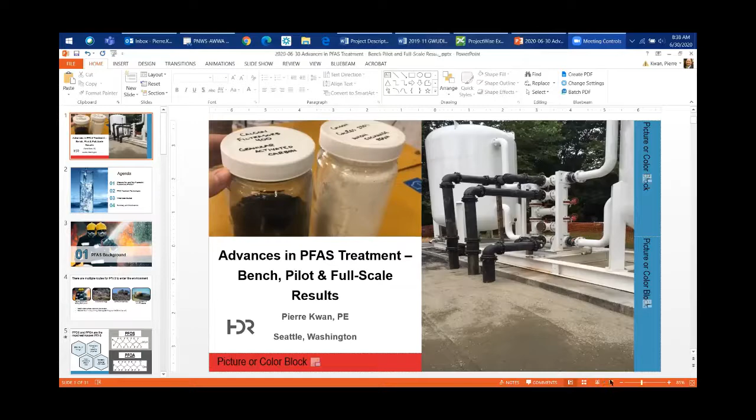So Pierre, I think you should be able to share your screen and present your presentation. Yes, Jolene, can you see my screen? Can everyone see my screen? Yes, okay great, we'll get started. Do you see the full screen, Jolene, or do you see how I present it on PowerPoint? It's showing your speaker view. Let me try something else, hold on just a moment. Maybe in display settings, okay does that work? Yep, perfect, thank you everyone.

It's a brand new world here, we're trying to accommodate the challenges everyone's facing right now. Thank you for joining today's water treatment presentation. The title of my presentation is Advances in PFAS Treatment: Bench, Pilot, and Full-Scale Results. I'm going to do three case studies of projects we've been working on, specifically dealing with PFAS.

Quick agenda: since I'm first, I'll give a slide or two description of what are per- or polyfluoroalkyl substances, the PFAS compounds. Then an overview of what utilities around the country and world are doing for PFAS treatment. Then I'll dive into three case studies to show actual full-scale performance, pilot testing, and bench scale testing results, and wrap up with summary and conclusions.

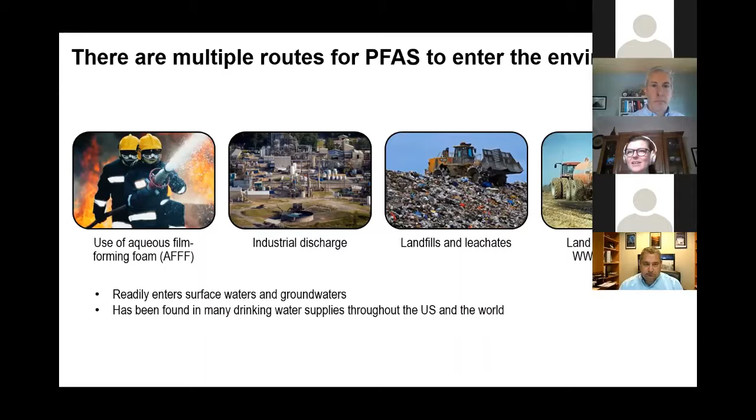So you can see it readily enters surface waters and groundwaters, and as a result it's showing up in many drinking water supplies throughout the US and the world. There's a huge family of compounds related to PFAS - over 1,000 different compounds have been identified. The most common are two specific ones: PFOS and PFOA.

There's a schematic design or chart showing these molecules. They do have health impacts. The EPA has established a health advisory level, HAL, of 70 nanograms per liter. If you're above that, the EPA recommends treatment, though it's not an MCL or secondary MCL. Many states have gone above and beyond that - especially, and I'll point to it later, Washington has proposed lower acceptable levels of these compounds in drinking water.

These compounds exhibit hydrophobic and hydrophilic properties, meaning they're in essence difficult to remove in many cases. Conventional treatment using coagulants or disinfection is not very amenable to removing these compounds. And the worst part is they're highly soluble and stable in water - once it gets into the aquifers or rivers, it moves quickly and does not degrade with natural bacteria. So they exist for quite a long time, and as a result they're not easily removed from water. They persist, and that's why drinking water utilities around the world are so concerned about this.

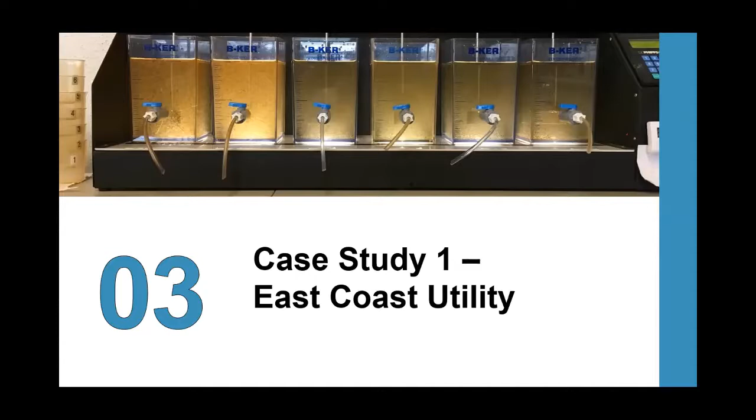So the first case study is going to discuss an East Coast utility. Because a lot of the sensitivity related to PFAS and its occurrence, especially in drinking water, this utility has offered to share the data—they just didn't want to be named in the presentation because of the issues they're dealing with.

For this one, this utility did a comprehensive surface water study. They're finding it actually in the rivers and reservoirs that they draw from for their treatment plants, and they wanted to investigate the occurrence of PFAS using powder activated carbon, PAC—a system they already had. And what does it mean, advancing towards the fate and transport of these compounds in the environment?

So it was studied with a watershed investigation, UCMR3. That was an EPA study that initially determined PFAS in their watersheds in over 20 locations. It was a 2-year investigation, and they found 11 different PFAS compounds in the water.

So then it was about adding a PAC system, or expanding the one they had. It was easy to implement, and initial literature showed it was effective for PFAS removal, but they wanted us to help identify the residual handling challenges—it is expensive to operate. Powder activated carbon isn't cheap; you use it only once, and it goes into your residuals that then have to be managed.

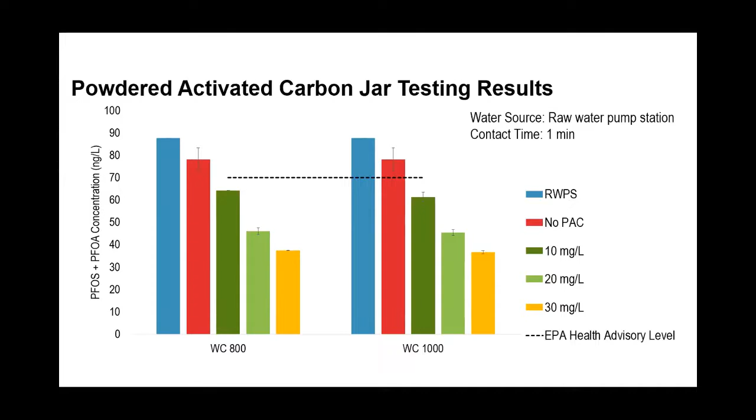The other thing we tested was in jars using a dose of just 20 milligrams per liter of powder activated carbon. We saw effectively no change in removal based on contact time. In this chart, we get about 50%, or slightly greater than 50%, removal for both carbons with only 1 minute of mixing time, contact time—so we just add it into the rapid mix, it goes through the flocculators, and out it goes, and we see half removal.

Then extending that to 60 minutes, all the way at the end of the sedimentation basins, we saw no real or minor additional removal with the Water Carb 800 carbon. We see better removal with Water Carb 1000, but still the vast majority of the removal occurred in that first minute—the additional 59 minutes provided some, but not substantially greater removals.

So taking these results into the full scale system, we decided on the 20 milligram per liter dose with the WaterCarb 800, and we see total PFAS, which is the summation of all 11 PFAS compounds found in the full scale plant. We saw a 42% reduction between the raw water and filtered water, and specifically for PFOS plus PFOA, we saw a 38% reduction.

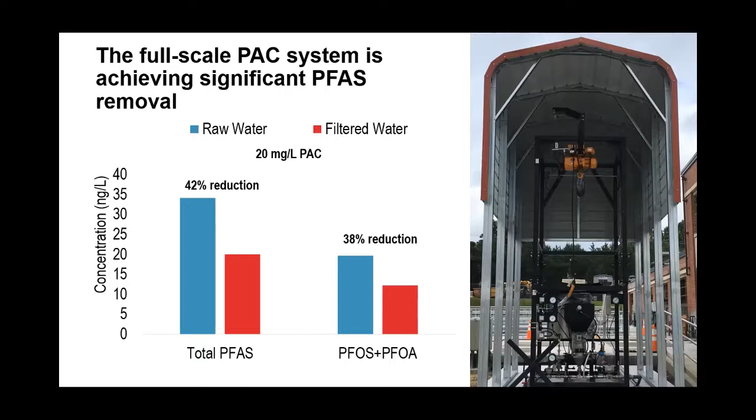A second case study, different state, similar situation. They wished to share the data but wanted to remain anonymous for now. They looked at granular activated carbon side by side with ion exchange.

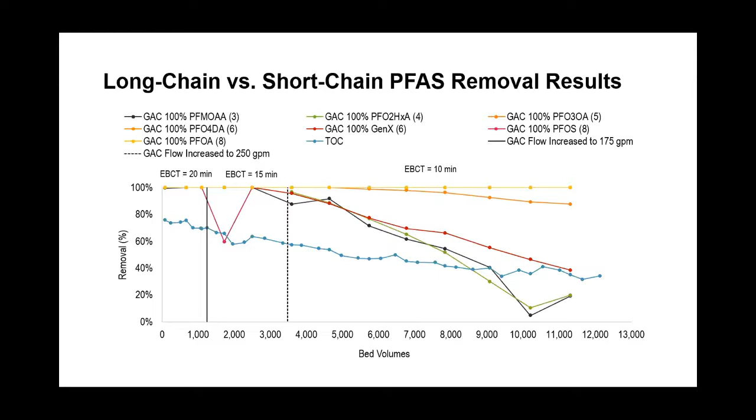Now that prior slide set is down to 70, and I'll show that the state of Washington has proposed lower numbers. So in any case, the PFOS compounds were much higher than all the limits, and we do see a smattering of other PFAS compounds in this water.

So this is a system that went into full-scale design and installation immediately. 2 vessels, lead lag configuration. We started off with the vessels, 1 vessel filled with bituminous coal and 1 with coconut shell carbon, in order to do full-scale testing immediately of which carbon acts better for removal. 20,000 pounds of carbon in each, and the system is currently designed for and operating at 250 GPM, expandable to 1400 GPM if contamination was found in other wells at this location.

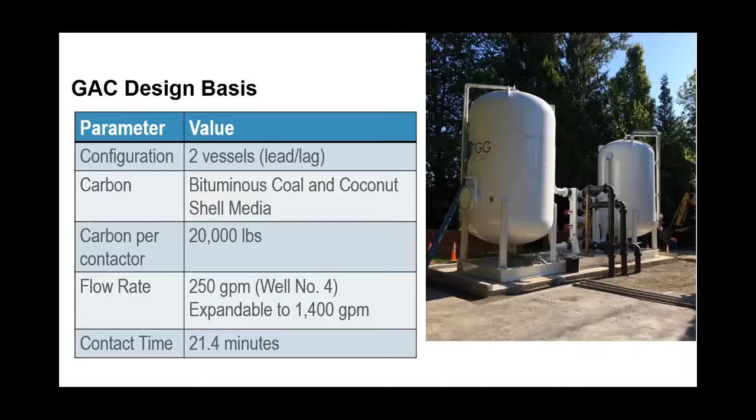It processed 102 million gallons before needing a change out, and that equated to 19,000 bed volumes before change out. Now compare that to the bituminous coal. It was installed 36 months and counting. In conversations with the city, they expect to start changing out that media sometime this winter.

So we can easily add another 6 months to that. So as of last month, they processed over 340 million gallons with this carbon, and so it's over 63,000 bed volumes. When it's all said and done, we could easily estimate 4 times the performance of bituminous coal in this full-scale test versus coconut carbon. Now because of that issue, both vessels are filled with bituminous coal.

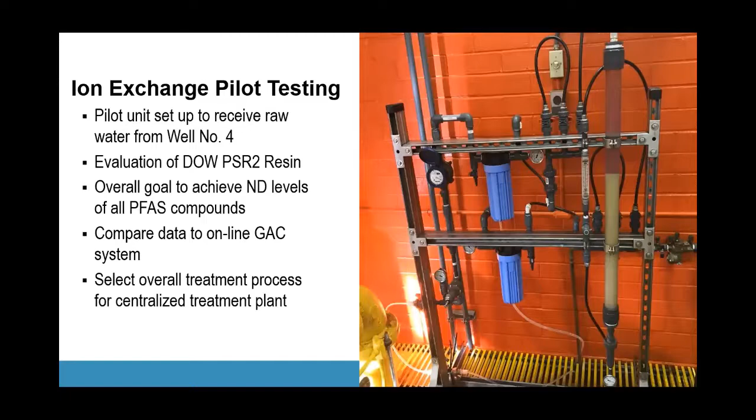Here's a little pilot unit. I want to note the tall cylinder on the right, the beige cylinder, that is the ion exchange resin. It came in slightly beige, somewhat translucent plastic beads. I want to point to that color later on, but right now at the start of testing it is a pristine beige color.

Pilot testing conditions: we loaded up the resins, really focus on the bottom line, which is empty bed contact time of only a minute to run the water through, versus the full-scale system at 21 minutes. Another benefit of ion exchange that's claimed is that you can load it with much faster reactions, and therefore use smaller vessels.

But in Issaquah, what we found is differential pressure. We saw that pressure really increase over time, starting at a clean filter differential pressure of 4 psi and increasing to 12. This happened over the course of just a month.

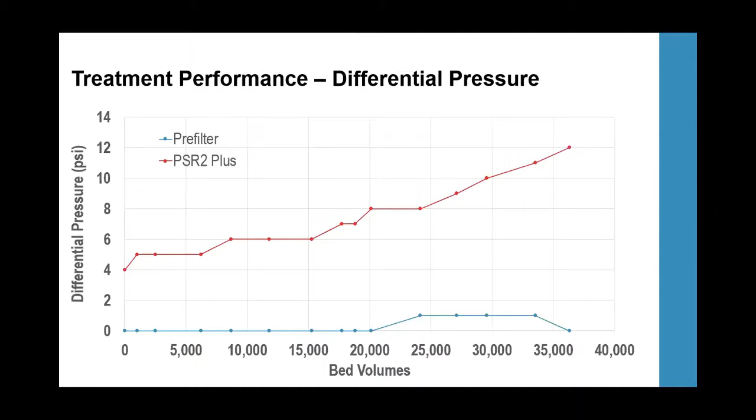The reason for that is we found there's iron bacteria in the well. It's naturally occurring, it's always been there. We sent the bacteria off to labs and found it's non-pathogenic, not a health threat, but it was specifically clogging the ion exchange resin.

This issue wasn't expected, so we didn't have an ability to backwash the pilots. The alternatives that came up were pre-chlorination and dechlorination for the resin, or high energy UV to kill the bacteria. But given these issues, and since the purpose of this testing was to move forward with full-scale design of their centralized treatment plant, the city decided not to pursue this and to continue with activated carbon.

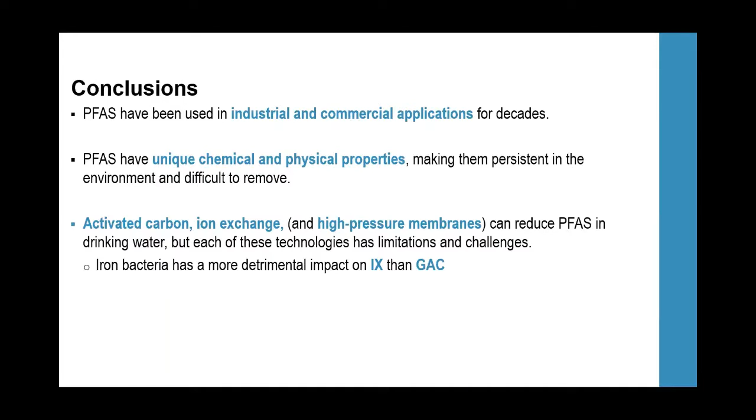High pressure membranes also work, I just don't have time to talk about that. Specifically, iron bacteria is more detrimental for ion exchange than for activated carbon in this testing.

The final takeaway points: all waters are unique and should be tested. There are a lot of different compounds you should look at besides just PFAS to identify fouling. If possible, you want to test different resins - ion exchange resin and activated carbon - to compare performance. You want to run it until you see breakthrough, and look at multiple ports in the columns in order to understand breakthrough patterns.

I didn't discuss nanofiltration or RO in this slide, but if you do test it, one very serious consideration is how do you manage that concentrate, because that residual brine is now very high concentrations of PFAS. So with that, I'm wrapping it up.

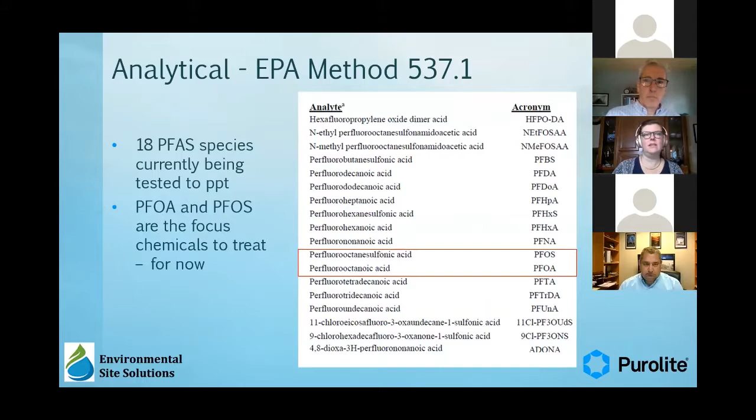So it's pretty pervasive. Very quickly, PFAS can be any one of almost 5,000 chemicals under the category of per and polyfluoroalkyl substances. We focus from a regulatory standpoint on PFOA and PFOS. EPA test method 537.1 looks at 18 different PFAS chemicals. Again, PFOA and PFOS have gotten the most attention, but some of the other PFAS are getting regulated by the states a little more tightly.

I think it's important to say that as ion exchange is getting more attention, we're seeing the numbers growing for ion exchange because it does have some significant benefits over activated carbon that we'll talk about a little bit later.

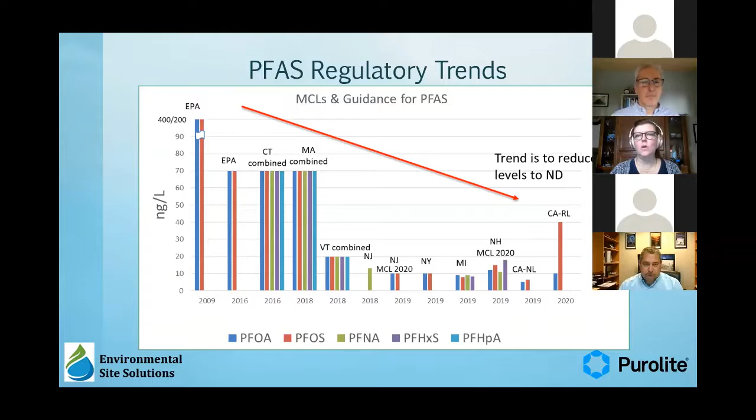But Washington has a DOH level of 15 nanograms or parts per trillion. Like I mentioned, I live in California. Even though we have a notification level and a reporting limit, as you can see on the chart, we're still being asked to have non-detect, basically on the lag bed.

So there's two different removal mechanisms that we see with these two different medias. The first is adsorption, and then with ion exchange, you have both adsorption and ion exchange. We're going to get into those a little bit.

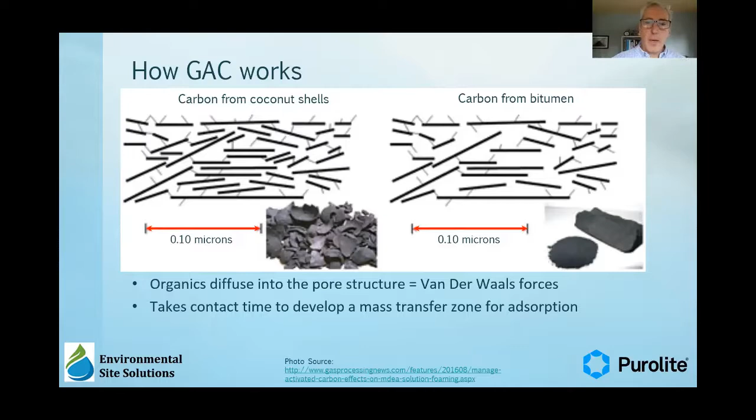Take it away, Mike. Yeah, so with granular activated carbon, this is kind of the industry slide, but it shows a good representation of pore structure within activated carbon. Activated carbon is an amazing material, has an incredibly large amount of surface area. So Kathy mentioned adsorption. Activated carbon works via adsorption, and because of the enormous surface area, it has enormous capacity to adsorb dissolved organics. We'll talk a little bit more about design, empty bed contact time, and mass transfer zone, and how activated carbon works.

What industry-wide we're looking at is about 10 plus minutes of empty bed contact time for treating PFAS. Other organics, you can run carbon at a shorter contact time, but we've seen 10 to 15 minutes is pretty normal for empty bed contact time design for PFAS systems. Carbon has the other advantage that if you have to take out other organics, whether it be chlorinated solvents or VOCs, carbon will take out those organics as well as the PFAS.

The challenge with carbon is it will also remove other organics, or TOC. TOC is kind of a generic term for organics in water, dissolved organics, which comprises hundreds of different organics. So that will compete to take up space in the carbon. Also with activated carbon, it does an amazing job on long chain PFAS, not as well on the short chain, as we'll show in the upcoming slides. And another nice thing about carbon, as we mentioned, is it's been used for years and has hundreds and hundreds of sites, and is very common for PFAS treatment.

So how ion exchange works. This is kind of a peek into my brain. I know that's scary, Mike, don't say anything.

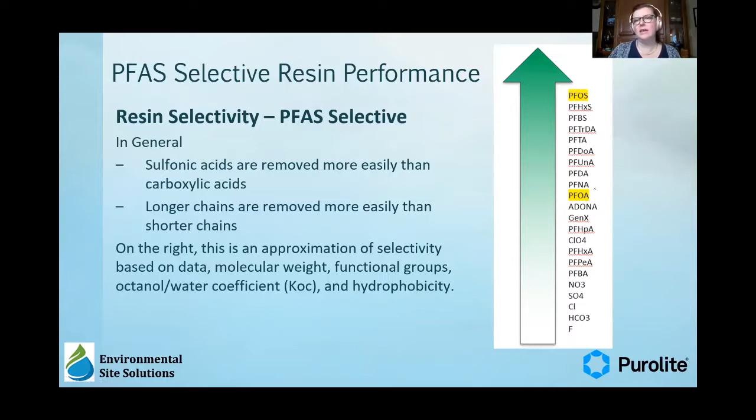So how does it know to kick off the chloride? Basically it's a function of the selectivity. You have your normal TDS in the water—nitrate, sulfate, chloride—and those are in the water like a million times more than any of the PFAS, generally speaking, for a drinking water application. As you go up this arrow, the resin becomes more and more selective. Anything with a sulfonate it's more selective for than the carboxylic acids, and the longer chains are selected better than the shorter chains.

So with resin, you want to make sure we're looking at a PFAS-selective, single-use ion exchange resin, because other anionic resins can pick up PFAS, but not to the extent that a PFAS-selective resin will. Purolite's is called PFA 694E, so if you see that in this presentation, it's pretty much synonymous. It can treat to 99.99% removal. The capacity is really determined by those other competitive anions in the water—nitrate, sulfate, chloride, etc. And as Mike mentioned, it's pretty effective on both long and short chain, and of course it's NSF approved.

I put this in here just to show you—it's really those other anions that determine the throughput of the resin bead, because the PFAS, though the resin is extremely selective for it, is in the water at a very small amount. It really only takes up about 1% of the bead's capacity, where all those other anions really determine the full capacity of that resin bead.

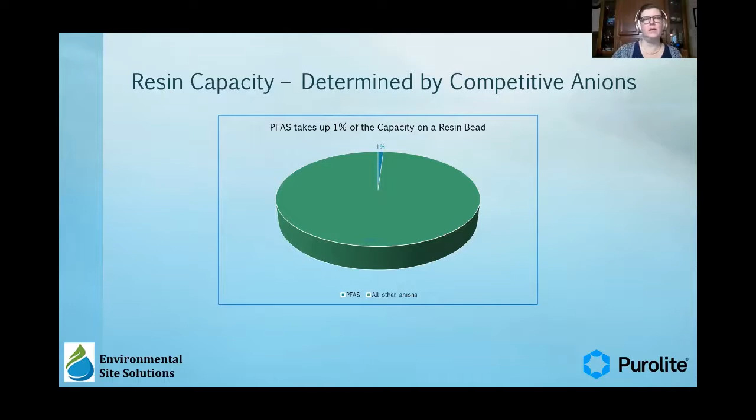Great, so now we're going to discuss a bit about design of a system. I can't stress enough the importance of water quality testing and analysis prior to the design. So we'll talk a little bit about water chemistry as well as modeling and piloting for system design.

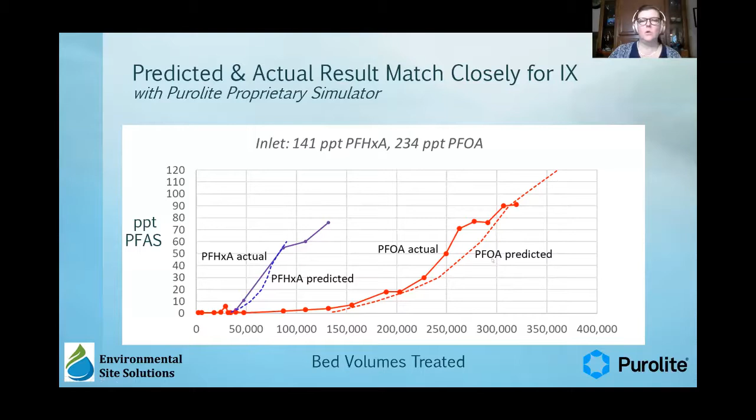With the water chemistry that Mike alluded to, if we have a very good water chemistry, we can accurately model ion exchange resin. I'll give you a couple of examples—the dashed lines are our modeling, the solid lines are our actual. This is a system on the East Coast, which has embraced PFAS treatment a little earlier than we have out west. But as you can see, the correlation is fabulous between the model and the actual.

So this would be a typical throughput model for ion exchange. This would be a Southern California site.

Generally speaking, even though we have many PFAS in the water, PFOA is going to be our driver for changeout because it breaks through before the PFOS.

A couple things to notice here: a lot of times we get the water chemistry from you, but then we're not sure what the endpoint is. If people are shooting for non-detect, that's a different point than if they're shooting for a 15 total PFAS or so on and so forth. So that's an important thing.

So here, what we looked at is, and I want you to remember this number for later, at 10 part per trillion we still have non-detect on the lag, and we'll get about 280,000 bed volumes in this example. We're going to go through an example in a little while, so I just want you to remember that number.

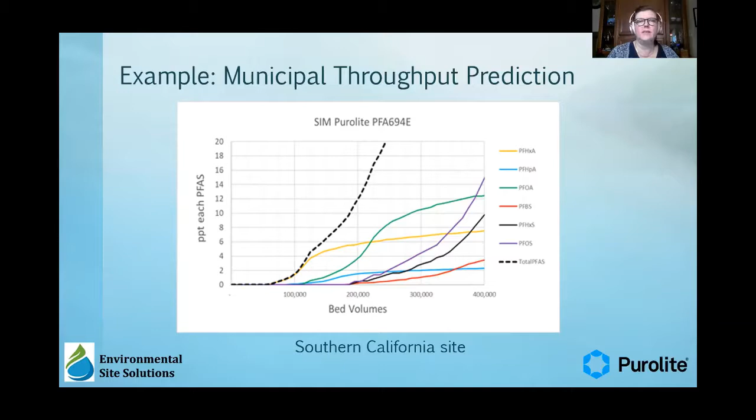Kathy mentioned modeling. Modeling can be done really effectively for ion exchange resin, not so effectively for activated carbon, because there's so much in the organics or the TOC. There's so much different type of organics. It's tough to model the PFAS.

So really, although we do need water chemistry for carbon, we'd be looking at either a bottle point isotherm test in the lab or running a rapid small scale column test, or RSSCT, which is a very common test for activated carbon. That will help us show throughput and model how long carbon will last.

Something to note: this takes time to see breakthrough, could take weeks, months. So what is typically done is there's sample ports put in at 25%, 50%, 75% of the bed to cut that breakthrough time. If we're looking at results after 25% of the bed, it's going to cut that time much shorter. There is a cost and a time that it takes to do a pilot, but we always highly recommend doing pilot systems.

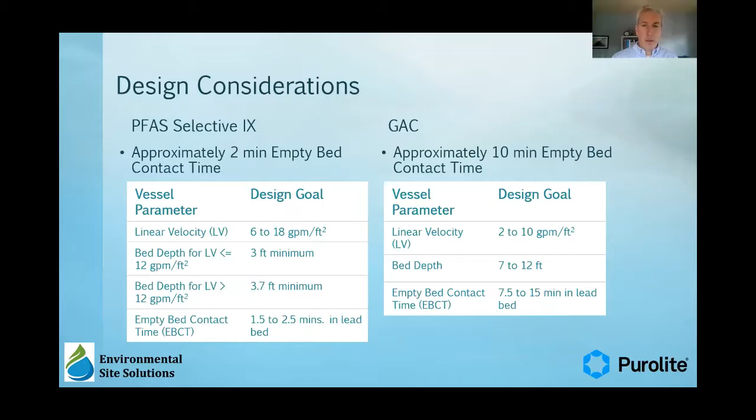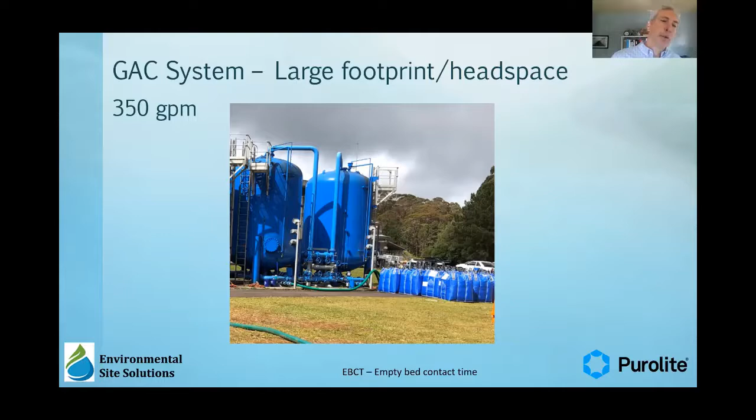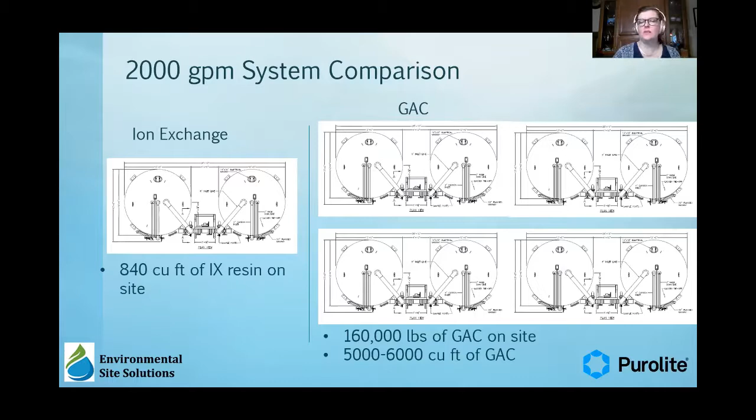The difference becomes even more dramatic as you go into higher flows. For an ion exchange 2000 GPM system, you can get away with one high flow 12-foot system with 840 cubic feet of resin on site. For GAC, if you're using 20,000 pound vessels, you would need 8 vessels and somewhere between 5,000 and 6,000 cubic feet of GAC. So like Mike mentioned, you're using 4 to 6 times more media with GAC than ion exchange.

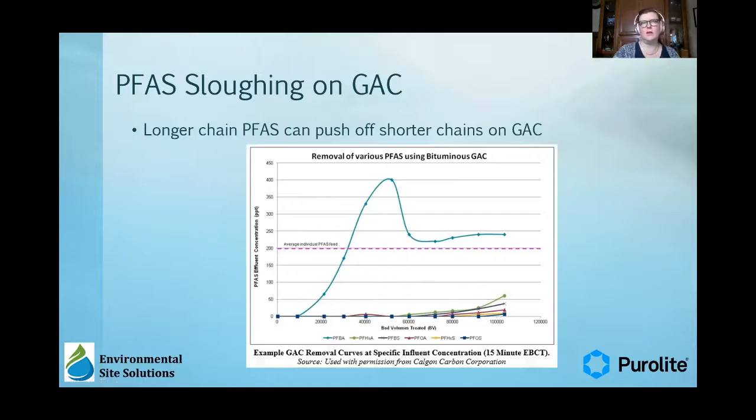One of the things we have seen with GAC is that because it's not selective for PFAS, it can slough or dump shorter chain PFAS. You can see in this example, essentially this is PFBA, the shortest of the carboxylic acids, the 4-carbon carboxylic acid. It comes in, and as the other PFAS are loading, the effluent concentration is almost double the influent concentration. So the influent's probably around 200 to 250, and it's coming off at 400 parts per trillion. That's not just seen with PFBA, but literally with every single one of these shorter chain PFAS until you get to your trigger change out for PFOA. So that's something to keep in mind as you're looking at different technologies and what states are looking at for regulations.

So Kathy, we need to breeze through this quickly, so I'll let you run through it, but we only have a couple more minutes to go. Okay, we're gonna fly through this.

So I wanted to drag you through an example so you can see what we're looking at between different designs. If we were looking at a 2000 GPM system, a couple things I want to point out: like I pointed out before, you have 4 times the amount of equipment, and this is only a 9-minute empty bed contact time, but it's still within the range of acceptable for GAC. Now, in terms of throughput, this is actually a real system—they were using GAC and getting 35,000 bed volumes. We estimated 280,000 for ion exchange.

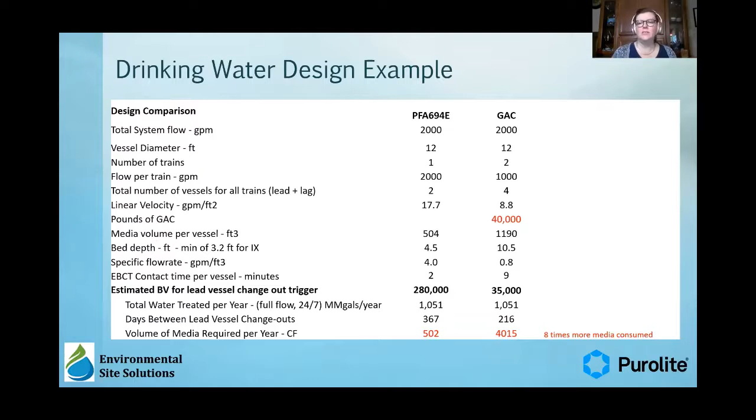Looking at those numbers, you have half the footprint, but you're also consuming 8 times more media. Now, if I change to 40,000 pound vessels instead of 20,000 pound vessels, as a lot of people have, now it's only half the footprint. The vessels are a lot taller, but I want to point out that you're still consuming, even with bigger vessels, the same amount of media. That still means 8 slurry trucks as opposed to 1 every time you do a change out.

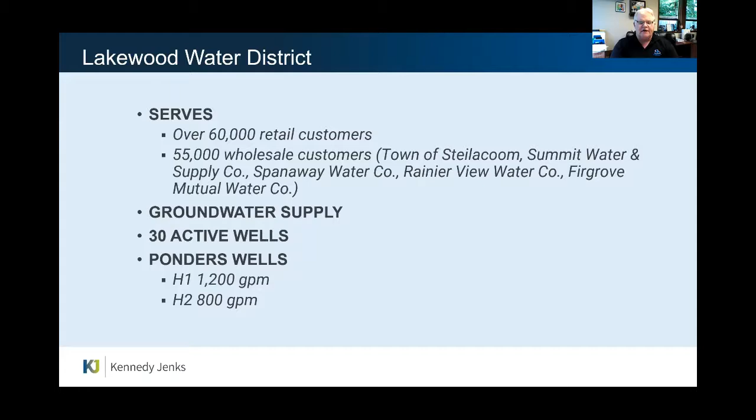Early on in the early 80s we detected PCE at the site. PCE was used in the 70s as a solvent for the dry cleaning process, and the Plaza Cleaners was a commercial laundromat and laundry service that served many of the businesses in the Tacoma, Pierce County area. In the 80s, it was linked as a carcinogen and as a toxic pollutant. The maximum contaminant level, or MCL, was set at 5 micrograms per liter.

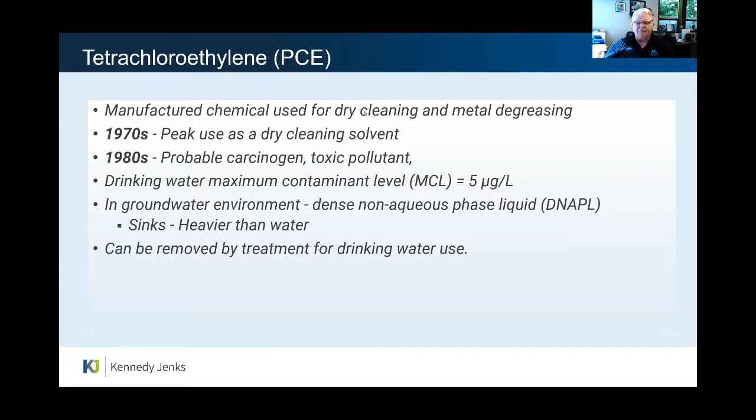It is found in the groundwater, and when it's in there, it's very dense and heavier than water. So that gives you a little idea of what you're contending with. It can be removed through treatment for drinking water use.

But as I mentioned earlier, in 1980, 1981, after we were testing for some SOCs and VOCs, we discovered at that time PCE at 18 micrograms per liter, and TCE also at 10 micrograms per liter. We also had dichloroethylene detected.

So what we decided to do was a 10-day pump test for both. We finally found the PCE ranged from 320 to 185 micrograms per liter. Later we measured the TCE at 28 micrograms per liter. This predates the VOC and MCL levels that we had at that time.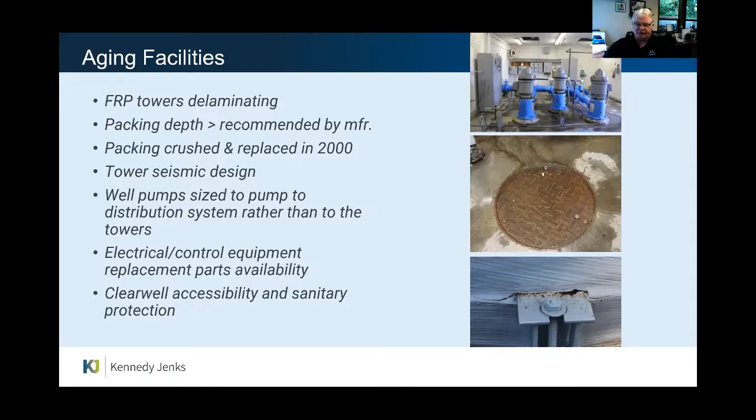There were some other things that made us nervous, which was the access to the clear wells you can see in the middle picture, which was recessed to some degree. So we were concerned about water quality issues around it as well, and had to take extra steps to make sure chlorination was happening. You can see in the bottom picture some delamination of the supports, and obviously not the most sufficient way for earthquake protection on the stripping towers themselves.

So all of this being said, we ran into funding challenges, to say the least. Back in the late 90s, EPA turned the site over to the State Department of Health. They took over primacy of it, and EPA did consider the replacement of the facility and maintenance. We did work cooperatively with them to see if they would continue to help the state, but they declined to fund any of it.

We did get an initial grant from the State Department of Health to look at the alternatives and really evaluate the site. Does it make sense for us to continue to use the site? Would it be more reasonable to possibly look at moving to another site? Those were part of the evaluation we did at that time. We also looked at what the impact would be if we did move to a new site, and what treatment levels or issues we might run into as well.

So at the end of the day, that study told us we really had the best alternative to stay at the site, given the water quantities and the flow of the aquifer. So we then had to work with the State Department of Health and Ecology to help get funding through the legislature, because this was really an EPA Superfund site that was taken over by the state. The state said we really had to work cooperatively with them to help get the funding for the replacement.

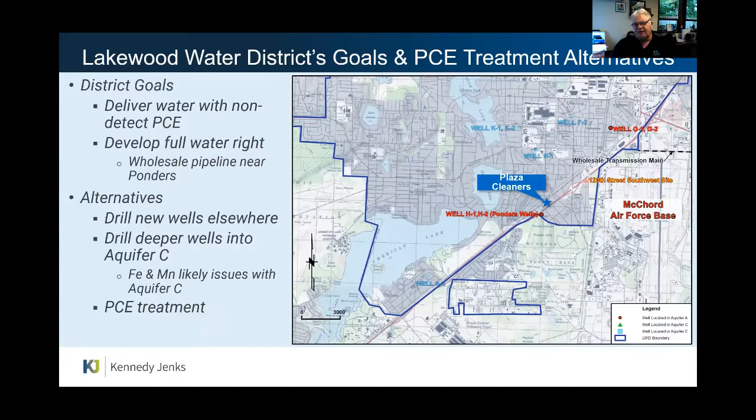Next slide. So at the end of the day, after we had staff involved and we engaged with our consultants, Kennedy Jenks, we ended up going back to air stripping. But we also decided this time to build the site knowing that we were dealing with at least 100 years of anticipated treatment, so we would go with something that would be there in the years ahead. And so we went with stainless steel stripping towers.

They're 25 feet tall. There's two of those. We have them in 8-foot diameters. And we have two booster pumps now. We've gone to line shaft turbine pumps, and those have been efficient.

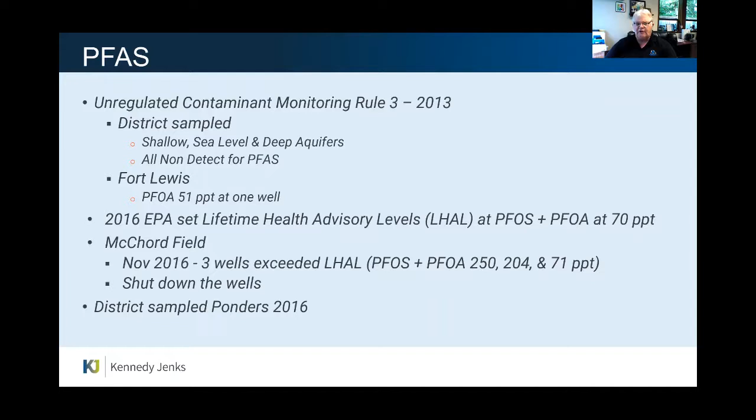And so we started to sample on a quarterly basis in 2016. Moving on, this gives you an overview of the site and how we feel that our contamination is coming from JBLM. Next slide.

This kind of shows the detection levels that we found with Ponder's well site. Our board decided to take a proactive approach, and we actually shut down the site back in 2018, because of the levels we were seeing with the PFOS and PFOA. Next slide.

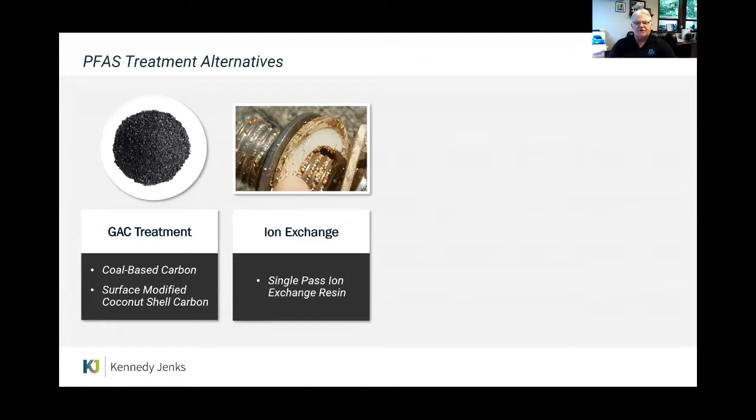So again, we decided to go with a GAC treatment facility for the site. Do you want to, Milt, talk about the different sites, the different types of treatment? Sure. So as has been discussed earlier today, there are 3 typical methods of treating for PFAS: GAC, ion exchange, and reverse osmosis, and there's always the potential for blending.

Blending wasn't really an option at this site, as also previously indicated. Reverse osmosis and nanofiltration are extremely expensive. And at the time we started working on this, I think there might have only been 1 ion exchange facility operating in the country, and I think it was operating in series with GAC. At that time, we were in the process of designing a GAC facility in Southern California.

So just looking briefly at GAC and ion exchange, GAC has been proven effective over the years. It's widely used for PFAS removal, and it's particularly good for long chain PFAS, which was our major concern.

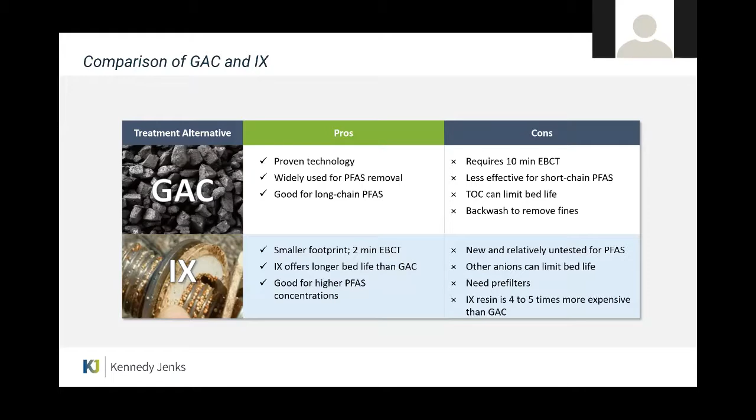So, as Randy indicated, the Ponder site was shut down in the fall of 2018, and the decision was made to add GAC for PFAS treatment. The intent was to try to complete this design and construction in time for the peak season of 2019.

That didn't give us any time for pilot testing, but we looked at some rapid small scale column tests we'd previously completed for Eastern Municipal Water District, which had similar low levels of TOC. At Ponders, we're looking at about 0.2 milligrams per liter of TOC, and at Eastern we had under 0.5 milligrams of TOC. At that time, the Eastern well 59 PFOS and PFOA concentrations were a fair amount higher than what we had at Ponders.

With the pilot testing conducted by our subconsultant at Eastern, we looked at both enhanced coconut shell and bituminous carbon, and two different models: constant diffusivity and proportional diffusivity. These models are used to basically develop the media size used in the rapid small scale column test. We were getting substantially longer bed life with bituminous compared to coconut shell, roughly about 4 times longer bed life.

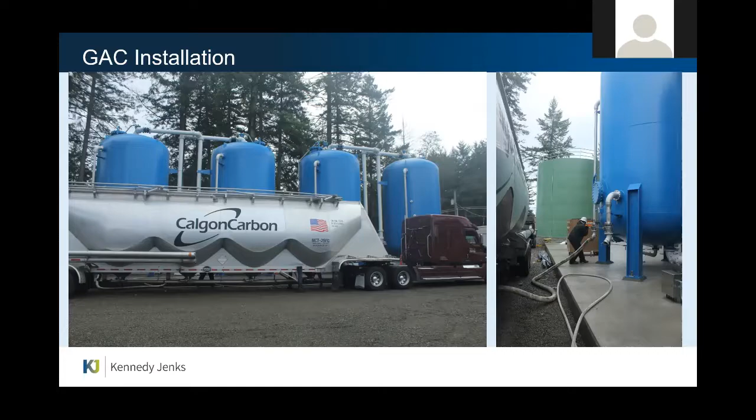And this is what the site looks like today, with the 2 packed aeration units, the precast or prefabricated pump station, the GAC vessels, and the backwash tank.

There were a few issues related to delivery of the GAC. The vendor didn't meet the delivery schedule, and we also had an issue where the GAC vendor was required to provide a template for the anchor bolts, and it turned out the anchor bolt holes on the vessels didn't quite match up with the legs. So we ended up having to scramble a bit to get them anchored down.

Also, the pump station was prefabricated, but being a prefabricated unit, it requires certification from Labor and Industries, and Labor and Industries didn't quite meet our schedule getting to the fabricator's shop, so it arrived on site late. We didn't quite meet the 2019 season, but it's been operating since January, with non-detects, as Randy indicated, both on the PCE and on the PFAS compounds.

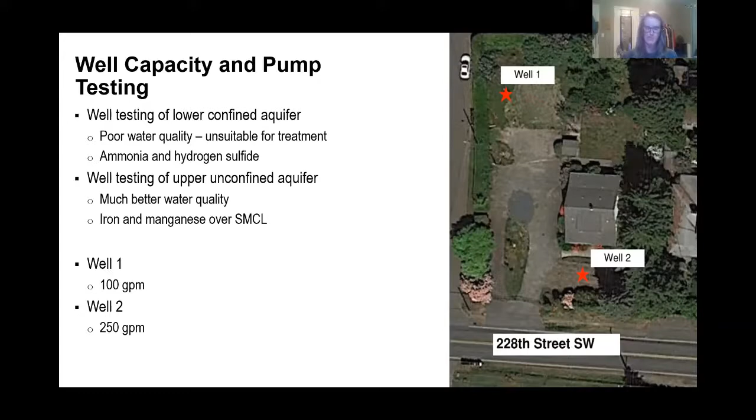Jumping into the treatment process selection for iron and manganese, we looked at a couple of different options. Adding sequestrant was one option, which disrupts the ability for iron and manganese to cause aesthetic issues in the distribution system. However, with the high levels we had, sequestrant probably wouldn't be very effective and could lead to black and red water issues with those compounds.

Typically sequestrant only lasts about 24 to 48 hours as a mask in the distribution system. With those 2 reservoirs, water is likely to be, especially in the wintertime, sitting in those reservoirs longer, around that 24 to 48 hour time period.

So that option was taken off the table. The second option we looked at was blending—diluting the iron and manganese concentrations with SPU water. However, with the limited capacity at the site of only 350 GPM, that really limited the amount of water we could pump to meet those secondary MCL levels. So that option was also taken off the table. The third option we looked at was removing the iron and manganese with treatment, and that was ultimately the selected option for the site.

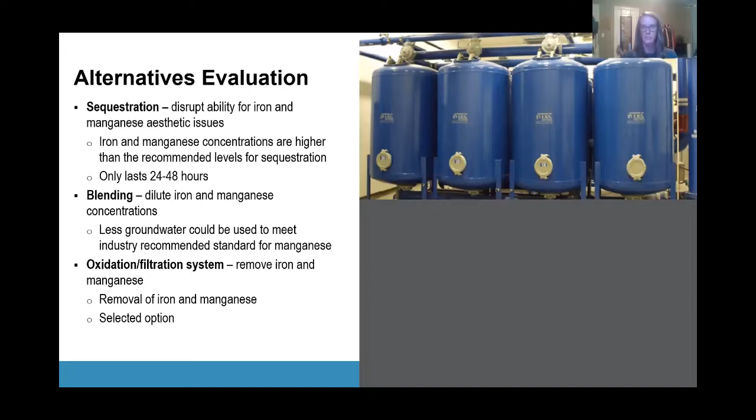So a summary of those pilot testing results: we ran the pilot test for a single day, and over that day the chlorine demand averaged about 0.6 milligrams per liter. That was the basis of the design for the new facility. As part of that, we paid close attention to pH—there was a small drop, but nothing too major, going from 7.6 to 7.58 over the course of pilot testing. As shown in the graphs in the previous slides, the pilot testing really supported a reduction of iron and manganese concentrations.

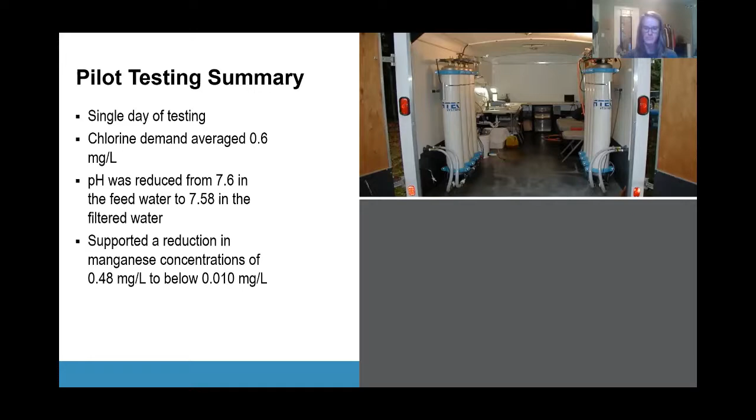Jumping into the filter design, the filters tested were pyrolusite filters. To meet the 350 GPM capacity, there were 4 filter vessels on a skid. This is not a redundant system, since this source is really going to be used for offsetting SPU costs in the summer and as an emergency source. So if some of these vessels went down, the whole facility would just go down for that time period.

The design flow rate is 350 GPM. Each of the vessels is 42 inches in diameter. The surface loading rate is 8.9 gallons per minute per foot squared during normal filtration operation. The empty bed contact time is about 1 minute during normal filtration, and the backwash rate is 269 gallons per minute.

So a little overview of the treatment processes. The main process is the pyrolusite filters, since that removes the iron and manganese, which was the main water quality issue. We're also adding chlorine, sodium hypochlorite, as a disinfectant. We're also adding orthophosphate for corrosion control, matching what the district currently feeds at their Deer Creek facility. Lastly, we're adding sodium fluoride, also used at Deer Creek and at SPU, to blend and make sure the water quality matches the existing sources it will be blended with.

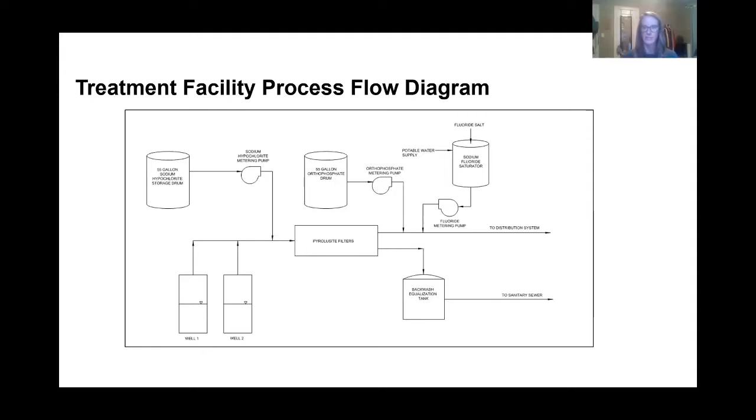Getting a little more into the backwash disposal, the waste sources for this backwash tank are the backwash waste from the filters, which are estimated to need backwashing approximately every 24 hours of use. This facility is estimated to run about 8 to 10 hours a day during the summer, so that could be 2 to 3 days before the filters have to be backwashed.

Also, the well 1 and well 2 blow off water, for when they haven't been started up in a while, feeds into the tank and is slowly fed out into the sewer through an air gap. The tank on site will be 10,000 gallons, quite large, but that will provide at least 24 hours of storage if the filters need to be backwashed and the wells need to go through the blow off line all at once.

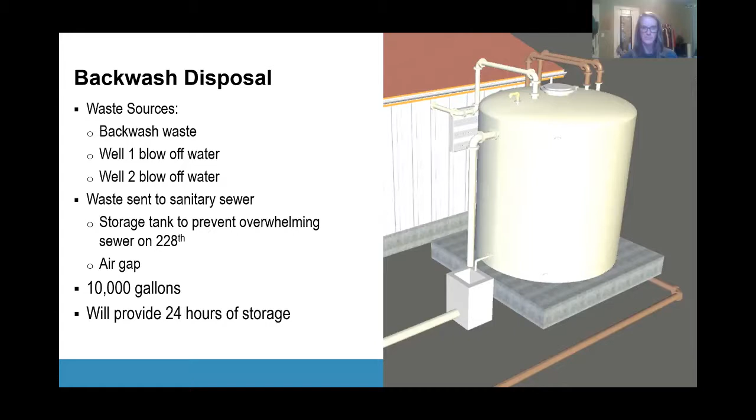So getting into the bulk of the presentation: the site constraints and the permitting requirements for putting a facility in this residential area.

Diving a little more into the project site, you can see the site is located on a cul-de-sac. The main access is through the arterial, 228th Street Southwest. This site is owned by the district - they own the house and maintain the property, and their water treatment operators can work on the landscaping and take care of everything there.

In the back of the property there are some mature fruit trees, and the district allows residents to come and pick the fruit and use it as they'd like. The district and residents really have access to the full property whenever they feel like it. The district currently has a covenant with the neighbors on that cul-de-sac - there are 5 houses, and as part of that covenant there are certain requirements for what the district can and cannot do to the site, really to fit the aesthetics of the neighborhood. That was something we had to be aware of as we went through this design.

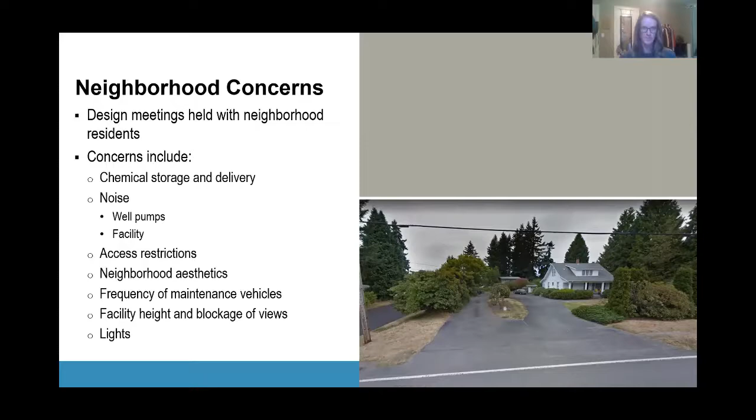Some of the facility features included in the design to address those neighbor concerns: submersible pumps for the well, so everything is below grade, which helps limit the noise when the facility is operating. Also facility vents for ventilation, all facing the interior of the site to limit the noise from the facility.

Also, really landscaping - like you saw, there's going to be a massive backwash tank, and we're really trying to blend that in with the neighborhood. We'll be adding some new trees and landscaping just to kind of keep people's eye away from that, so it doesn't look like there's a facility located on the site.

Also, really being involved with the neighbors as we get to this final design stage of selecting the color of the facility and little details like that that the neighbors may have opinions on, even though it really doesn't matter what color the facility is. That's where we really want to involve them in that process.

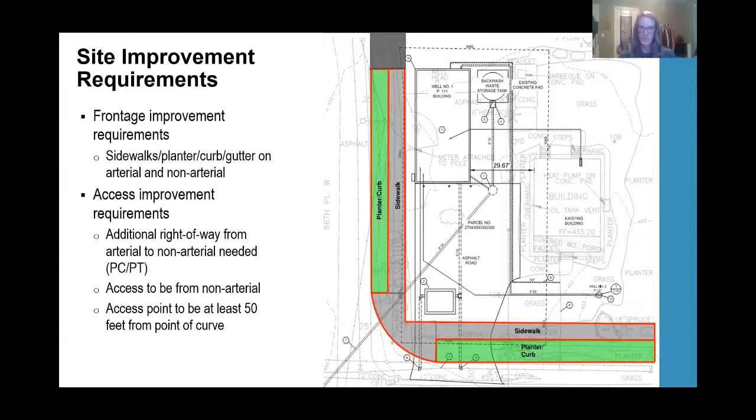So the current status of where we're at in design is we've submitted a couple deviation requests. Those requests are to propose a lesser standard on that non-arterial cul-de-sac street. Instead of 7-foot sidewalks, a planter, curb, and gutter, we're trying to propose 5-foot sidewalks, which is what most of the cul-de-sacs in the area have, if they have sidewalks at all. We're also proposing to maintain the current access point on the site as it is now, because we don't want chemical delivery trucks driving down that cul-de-sac, and to help meet the concerns of the neighbors. Those are two things we're waiting for responses on.

But we will be adding in a sidewalk, curb, and gutter on the main arterial street in the front of the site, because that whole street is going to be redone in the next couple of years. Additionally, adding on the sidewalks adds a lot of impervious surface, which has triggered some additional stormwater requirements that we're now going through, requiring us to do some pilot infiltration tests and review a couple more on-site stormwater management options.

Jumping into operation and maintenance of the facility and the site itself. Since it will only be used in summertime, we want it to be easy to start up and shut down, and sit idle easily, making it simple for operators who will now manage two different facilities: this one and the Deer Creek water treatment plant.

Part of that also involves managing chemical deliveries in this residential neighborhood, making sure we're efficient about when those chemicals are delivered so they don't disrupt the residents.

We also need to maintain the landscaping. The neighbors enjoy the fruit trees on site and like to pick the fruit, so the district plans on maintaining those, along with the flower beds, all the landscaping, and mulching.

In addition, maintaining a secure environment is important. This will be a facility that needs to fit in with the neighborhood without causing safety concerns or drawing attention to the site.

Moving into summary and conclusions, a few tips from what we've learned throughout this project. The most important one is to engage the community, and engage them early. Many of the concerns we received from residents were very easy to address as part of our design.

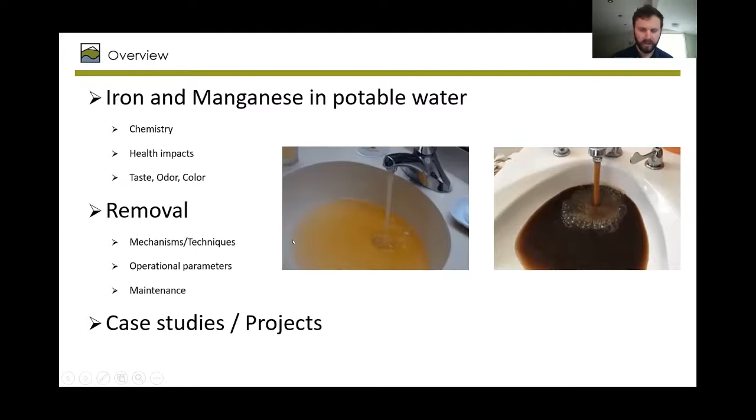So the basics: iron and manganese are two metals that are common in the Earth's crust. You see here elements 25 and 26. They often occur together, but not always. They're often in their dissolved state, but they can also be in their particulate state. We're often worried about it in the dissolved state. These are cations, positively charged ions. Some common redox states: manganese in the +2 or +4 oxidation states, iron in the +2 or +3. They can show up without color in their more reduced states, and once they become oxidized, this is often when we see the color — the typical brown, red-brown, black. I'd say they're common in groundwater, commonly occurring in their dissolved form. They can also show up in surface waters, especially anaerobic zones of deep reservoirs where there's reducing conditions.

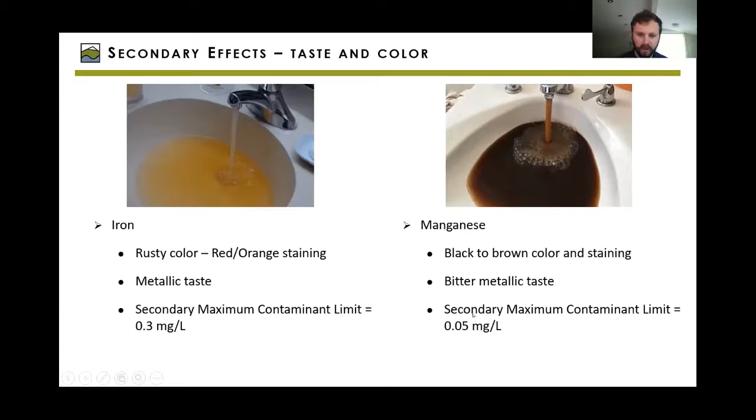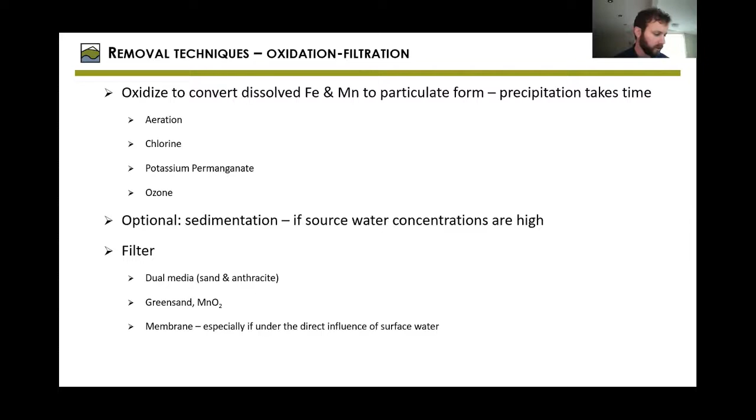The next technique I'll touch on is categorized as catalytic media filtration, which is kind of the same idea as oxidation filtration, but the precipitation is catalyzed essentially by the media, so it doesn't require a big reaction chamber and long reaction times. I forgot to mention it, but to fully precipitate iron manganese can take quite a bit of reaction time - it can take up to about 20 minutes for iron, or even an hour for manganese for full precipitation.

But in this catalytic media filtration process, that time is greatly reduced, and actually the oxidation and precipitation can occur within the filter itself. So it doesn't require the reaction chamber and volume that would otherwise be required. It can also utilize some adsorption within the media, so there are multiple processes going on. This is a really common technique, and we'll compare these at the end, but this is what I've seen to be the most common way to remove iron manganese.

Again, it relies on oxidants to both regenerate the media and oxidize the iron manganese. Common oxidants are usually chlorine, especially sodium hypochlorite, or potassium permanganate. It relies on the filter media, which is often some proprietary media, but usually some form of manganese dioxide, either ore or coated sand. For each proprietary system, there are various loading rates, mechanics, backwashing requirements, and removal efficiencies, but I think most of these are on the same order of magnitude, with some slight nuance differences in the manufacture of the system.

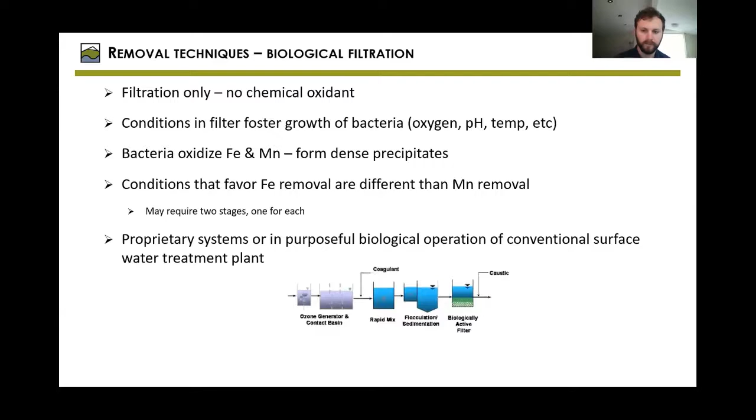The fourth and last removal technique to discuss is reverse osmosis. This can remove almost all suspended and dissolved components in our water. The downside is that it requires either remineralization of the water to make it palatable and less corrosive, or the other technique is to blend some portion of the flow around the RO unit.

If you've just got iron and manganese and no other contaminants of concern, it's probably not going to be cost effective. But if you've got other contaminants of concern as well, that's when RO can be more cost effective—if you've got hardness, chlorides, or other things that RO is effective at removing, it might make sense.

So just to recap on the treatment techniques here: we've got oxidation filtration, which can be effective, but to have full precipitation can take a lot of time. So more commonly, catalytic media filtration is used. It can efficiently remove iron and manganese, it's cost effective, has a small footprint, no large reaction chamber needed, and is easily operated.

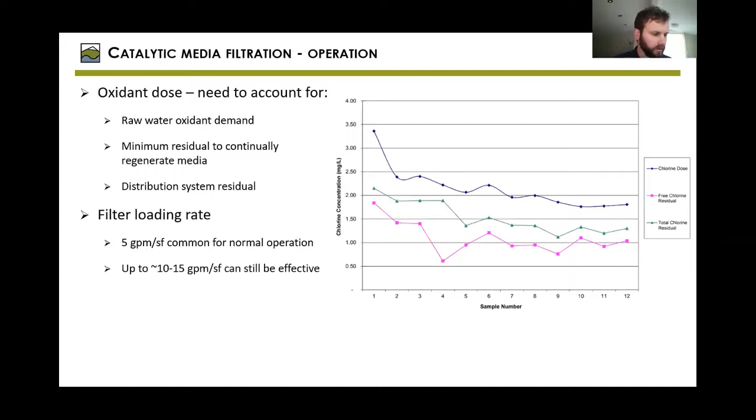That's going to shift the pressure, so where your operating point is, you need to account for that. That worked well with constant flow rate sources.

It's a little more challenging if you've got changing flow rate in your source or multiple sources, because you really need to maintain a set velocity through that filter, set flow rate through that backwash to make it effective at backwashing off the particulate iron and manganese.

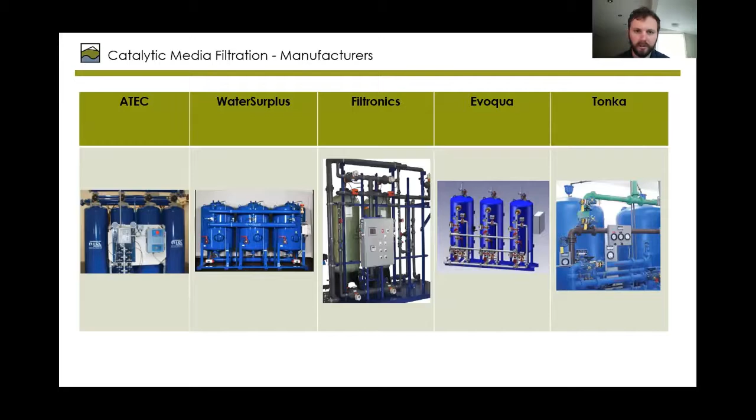I've got a slide here on a number of common manufacturers of catalytic media filtration systems. ATEC is a common one; they're based in the Northwest, and there's a lot of their installations here. Some other manufacturers that also make these systems are WaterSurplus, Filtronics, Evoqua, and Tonka.

Real quick here, I've got about 3 minutes left, so I'll touch on these 2 example projects.

A lot of systems these days don't have these reaction vessels - there's not much contact time before it hits the filters. Anyway, this project is kind of a fun one; we're phasing the improvements, replacing the treatment equipment now. The pumping equipment is still in reasonable shape, so we're upsizing that as part of it.

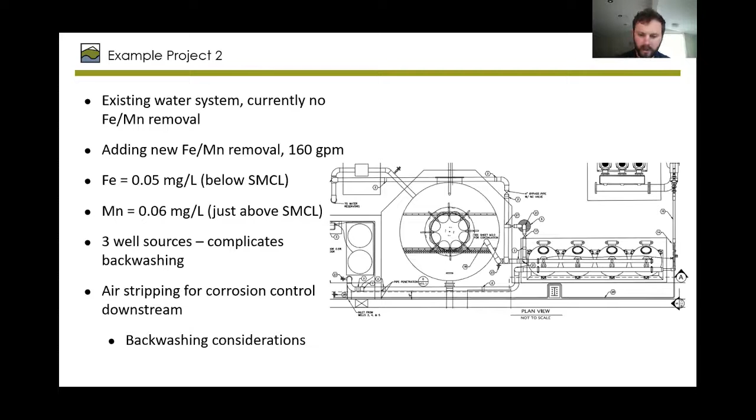Looks like I'm about out of time here. See if there's any questions. I'm not seeing any here.

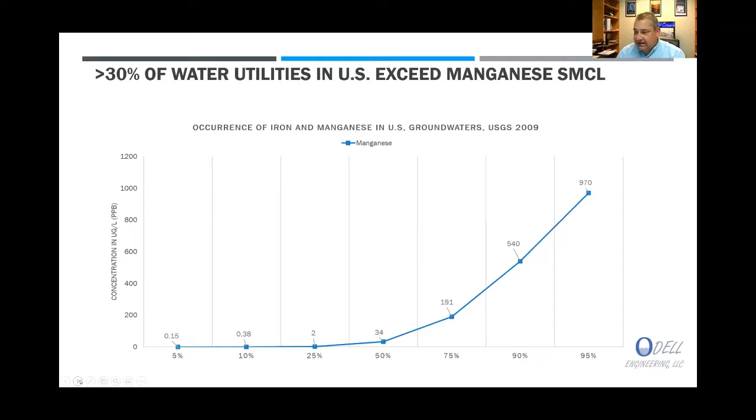Great lead-in by Brian. We're going to talk a little bit about manganese because it's very common. About 1/3 of water utilities in the US are above the secondary MCL of 0.05. It's commonly found in a reduced form in groundwater and can be oxidized by exposure to a number of different oxidants. The reduced form is manganese, Mn+2. The oxidized forms are Mn+3 or +4, and even higher oxidation states for permanganate. Normally CO2 works to dissolve manganese in minerals and forms manganese bicarbonate compounds, but sulfate reducing bacteria can also be present, so you might have manganese sulfide compounds, or you can also have organic complexes with the water.

So why do we want to remove it? Brian gave a great example - you see discolored water all over the place. There's also a lot of concern about buildup of manganese scale in distribution pipe, and that scale will periodically release large volumes of material and cause discoloration events, and a number of different things can trigger that. There's also a lot of new health information that shows it may have a neurological effect in children. So just last year, Canada updated their maximum allowable concentration, establishing both a primary health level, a MAC of 0.12 milligrams per liter, as well as a lower aesthetic objective of 0.02. That 0.02 level is really there to prevent scale buildup in the distribution system.

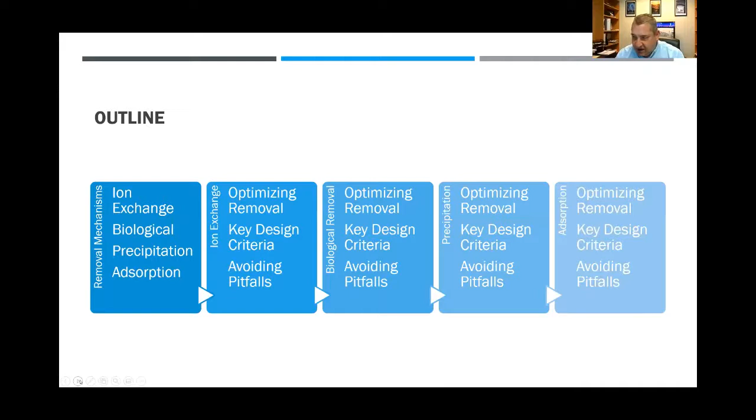So I'm going to cover the different removal mechanisms to get manganese out of water, and then talk about each one - maybe what the key design criteria are, things to think about to optimize removal, and some concerns or potential pitfalls with each one of those. First, removal mechanisms - there's a lot of different ways to get rid of iron and manganese. If you do any research, you'll see all kinds of different ways. Some of them they say are proprietary and don't want to tell you how they work, but there's really only 4 ways to get rid of manganese from water.

You can exchange it in a cation exchange process. You can uptake it with a biological process. You can precipitate it and remove the precipitate, or you can adsorb it onto oxides in media. So let's talk about each one of those. Ion exchange first.

The removal process for manganese is the same as for water softening—it's a cation exchange process. Calcium and magnesium are present in water as divalent cations, and that's the same form that manganese takes in its reduced form, as well as iron in its reduced form. So the same process used for calcium and magnesium removal in cation exchange is also potentially available for manganese removal.

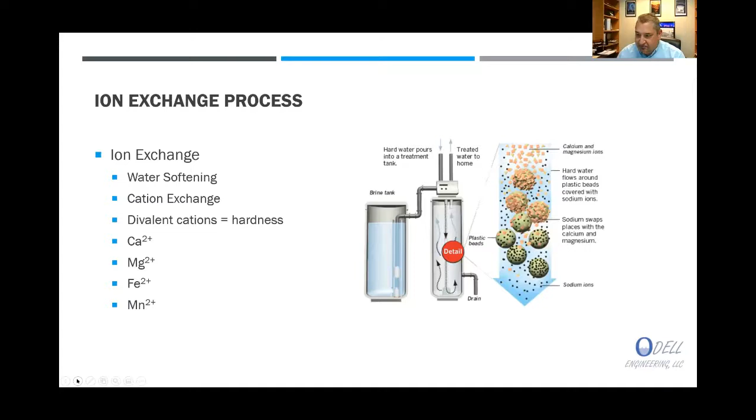For ion exchange design criteria, vessel sizing is really dominated by calcium and magnesium removal. So when you talk to ion exchange suppliers about softening, they all want to know how many grains of hardness you have. A grain of hardness is 17.1 milligrams per liter as calcium carbonate. You can convert your hardness in the water to grains, and they'll tell you what size softening system you need.

Loading rates typically can be 8 to 12 gallons a minute per square foot. 10 is very common for ion exchange softening. The size and number of vessels are really based on the total resin volume and how frequently you might want to regenerate the system.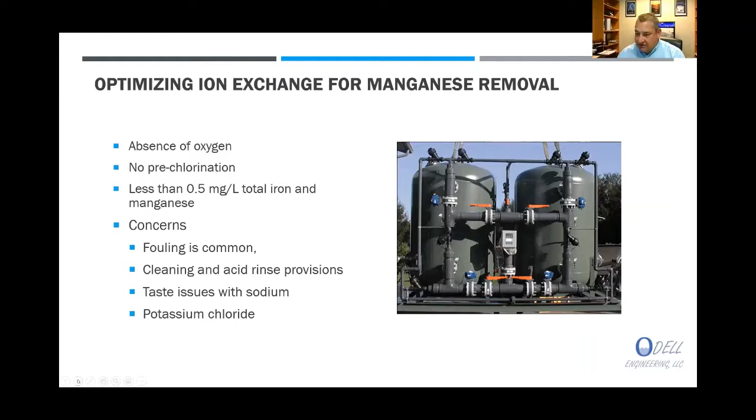Chemical storage sizing is important. Brine storage depends on the size of the system. You want to look at your max flow and your average flow, how much brine you're going to use, and how frequently you're going to regenerate it.

The saturated brine concentration is typically about 26%. You use about 10% for regeneration, so you need a method to dilute it. Typical application rates are 10 to 18 pounds per cubic foot every time you regenerate, so you can use a lot of salt.

Brine disposal is getting more difficult to permit. Even through sanitary sewers, a lot of places have discharge requirements with TDS or chloride limits.

Biological manganese removal is another way to remove it. It's not always easy. The largest plant I've been to is Lake Havasu water treatment plant, which has a 25 MGD design capacity. It doesn't operate at 25 MGD though, it operates at about 10 MGD with a filter loading rate of about 1.3 gallons a minute per square foot.

The water goes through this cascade aerator, is picked up in a Ranney collector. It has a fair amount of manganese, about 2.5 milligrams per liter. It goes through this cascade aerator and then into these large gravity filters that are just sand filters, with manganese built up as a coating on the outside of them over time.

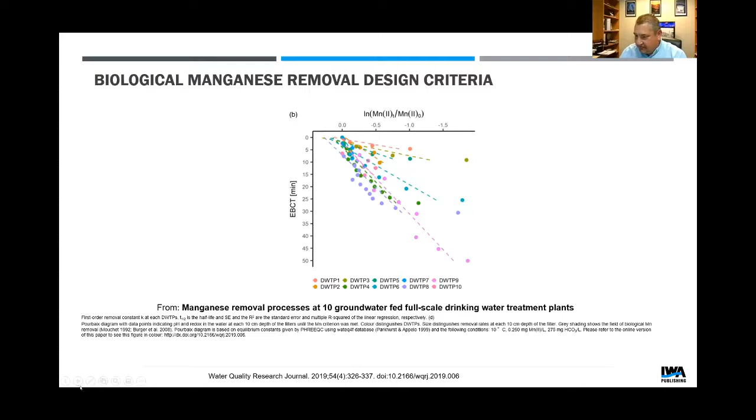The other thing to keep in mind is there are specific oxidation states that the manganese bacteria like. Depending on the pH, 8 to 9, a positive oxidation of 300 to 500 millivolts or 200 to 300 millivolts. Just to give you an example, water saturated with oxygen is kind of in that range, about 300 to 400 millivolts. So highly oxidized water, pH up to 8 to 9, is important for manganese removal biologically.

Manganese is way harder to remove biologically than iron is. This is a test I did on some equipment for EPA, a 6-month test, and the manganese would slough off all the time. A change in flow, it was hard to figure out the reason. One day everything would look great, come back another day and the water would just be coffee-colored. So unless you have very steady water quality and really conservative filter design, like Lake Havasu, you can have potential upsets with that.

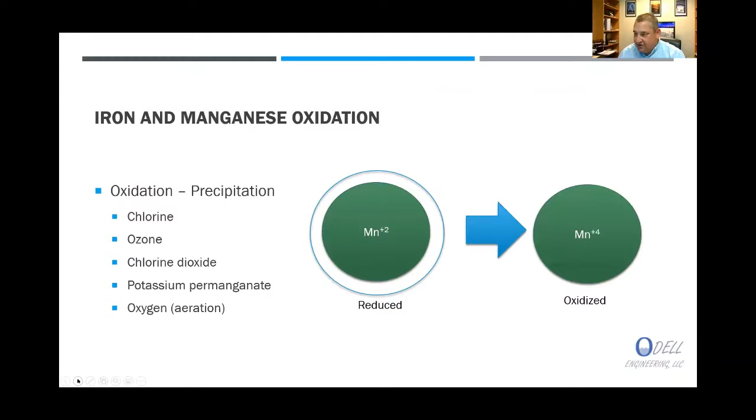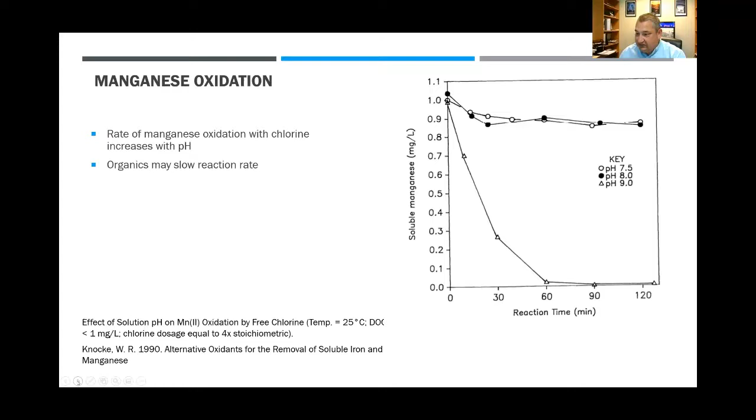Even chlorine can be a challenge. This is an oxidation study that Bill Knocke did back in 1990, for various pH ranges. If you have a pH of 9, chlorine can oxidize manganese in 30 to 60 minutes, about 60 minutes for complete oxidation. But if you lower the pH to 8 or 7.5, that oxidation rate just slows way down. So that's a key thing with trying to precipitate manganese - getting it to actually oxidize and precipitate.

Even with potassium permanganate, pH plays a big role in how quickly that occurs, as well as things like dissolved organic carbon - the more DOC you have in the water, the slower the reaction time. But potassium permanganate can react a whole lot quicker than chlorine does. So typically, if you're trying to precipitate manganese, some stronger oxidant than chlorine is very often used.

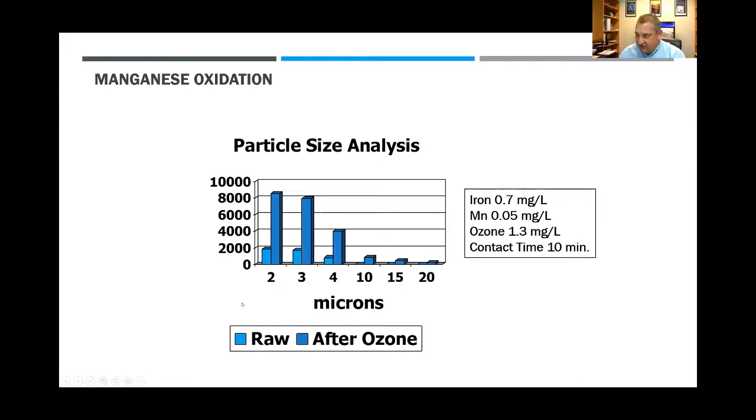One of the concerns about precipitating iron and manganese is that the particles you form are very small, on the order of 1 to 2 to 3 microns in size generally. That means you have to generally have a pretty conservative filter loading rate, typically 3 to 5 gallons a minute per square foot.

A typical schematic might be chlorine plus permanganate, maybe adjust pH a little bit, and sometimes a contact tank is needed to get that oxidation to occur, then onto your filter.

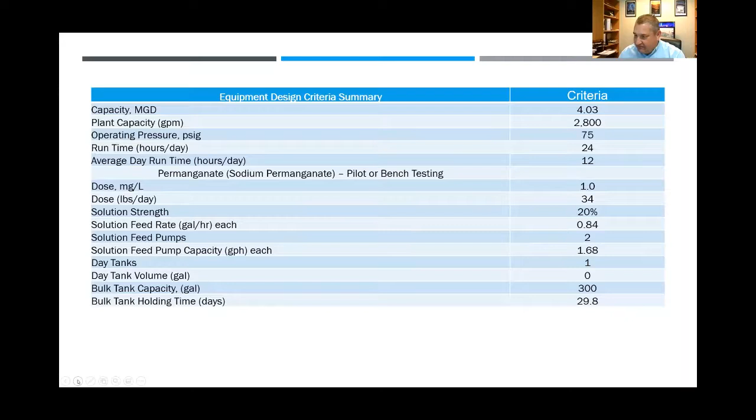The design criteria: for chlorine, you can figure out from pilot or bench testing, but really understanding the dose it takes to oxidize it is very important, and then you can size the rest of the equipment from that. For permanganate, you can also do pilot or bench testing to look at how much it needs to oxidize manganese. If you're going to adjust pH, you can do bench testing, titrations, or use a water quality model like WaterPro to figure that out.

And if you need a reactor vessel, you can pilot test it, but a lot of times people will just calculate how much time they want, put a baffling factor in, and size it that way.

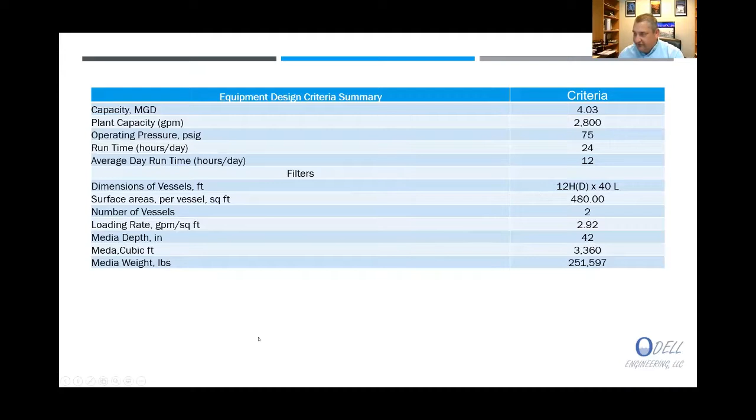Filters generally use filter surface loading rate - it's kind of the key thing, so 3 to 5 gallons a minute per square foot. You can size horizontal or vertical filter vessels based on that.

And then backwashing... oh, what happened? What was that? Let me see if I can reshare. Did somebody else share their screen? No, it looks like it's your screen. All right, well...

Backwashing is just gallons per minute per square foot times the square foot of the filter vessel, which gives you a backwash rate. The frequency of backwashing you really need to determine by pilot testing, and the duration could be 10 minutes or reduced if you have some air scouring associated with it.

Some of the pitfalls with precipitation are really getting the oxidation rates right. This is kind of a conservative design for iron and manganese, and you see some places just follow Ten State Standards or state protocol for designing these things and move ahead with it. But I've seen some multi-million-dollar treatment plants that don't work because they didn't have the right oxidation or contact time ahead of the filter. So it's really important to at least do some bench testing if you're going to precipitate iron and manganese to make sure you have the right dose and the right contact time and pH adjustment if you need it.

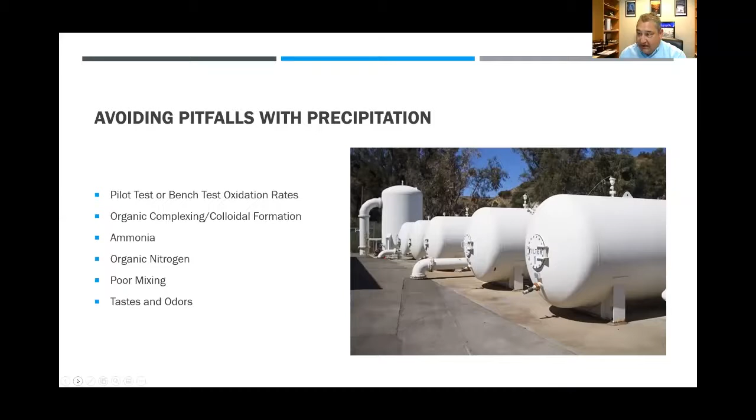Poor mixing can be a problem, and then just other taste and odors from organics or hydrogen sulfide that causes a metallic smell. So pilot testing is great - that's a good way to identify all those ahead of time, but it's not always done.

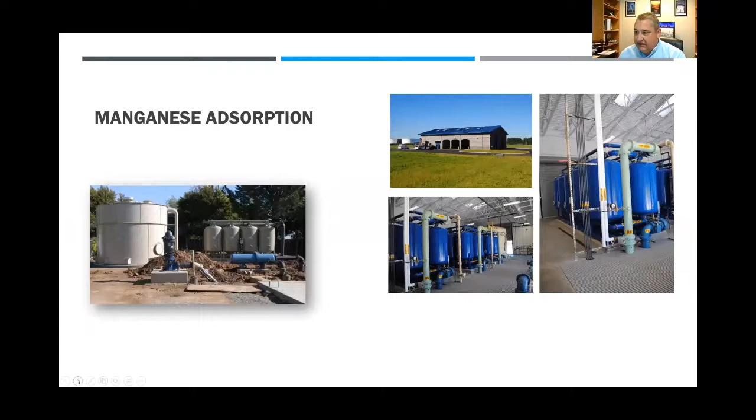So lastly is adsorptive removal, and Brian also talked a little bit about that. There are a lot of plants in the Northwest that use adsorptive processes for manganese removal, and it's probably the dominant way to remove iron and manganese in modern plants anyway.

Some of the things you're looking for ahead of time before you design the plant are, again, you want to get your chemical feed doses right. You want to look for removal effectiveness with pilot testing, identify a filter run length before you have to backwash it. But with adsorptive removal, you can oftentimes really maximize the surface loading rate on the filters, so it's not uncommon to have 8 to 10 gallons a minute per square foot. There are a few plants operating at even higher loading rates, up to 16 gallons a minute per square foot.

And the thing about adsorptive removal is the flow process is very simple. This is from a pilot test that I did in November - it's just chlorine injection and then right through the filter. In this case we were testing multiple different medias, but it's very simple.

It works at low pH. You're not trying to precipitate the manganese. You just want the chlorine to oxidize the media, and then that oxidized media will pull the manganese out of solution as it has that surface reaction with the manganese dioxide on the media.

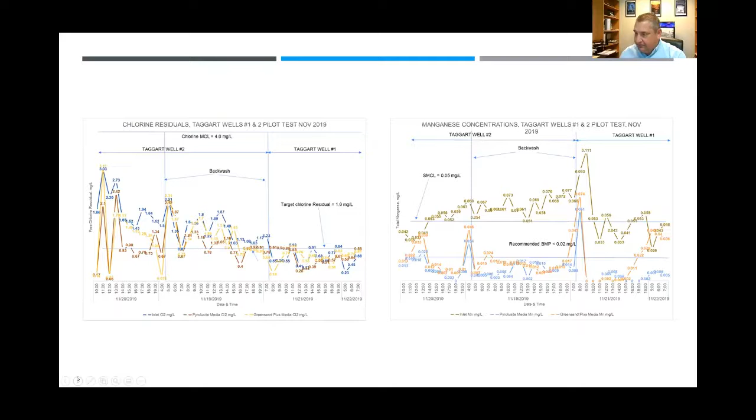If you don't keep the media oxidized with adsorptive media, whether it's green sand or pyrolusite, or you're making your own oxidized coated media, it will lose adsorption capacity.

So periodically, you could regenerate it by soaking it in permanganate, and some places do that. But you have to keep the media oxidized for it to maintain an effective removal capacity.

A couple other pitfalls to watch out for: it's really infrequent, but sometimes the media will grow to a pretty large degree. And once the media starts to grow, you may not have enough backwash flow to effectively clean the filter. That can be a problem from a performance perspective, but it could also have some biological activity in this media coating and can lose adsorptive capacity. So that's something to keep an eye on, and just monitor your media periodically.

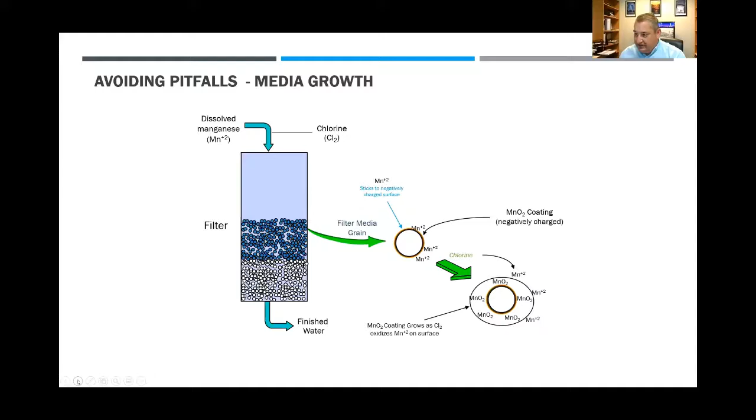I'd say of a couple hundred of these plants that I've been involved with over the last 20 years, I've seen it maybe 4 or 5 times that's occurred. So it's pretty infrequent. The other thing that can occur is silica can adsorb onto the coating of the media, so manganese dioxide can react with silica.

It tends to be an issue if the pH is up above 7.5, maybe up to 8, 8.5. And that's something you can test during pilot testing to see if the silica is adsorbing on the media. And if it is, there's ways to mitigate it, typically with a little bit of permanganate addition. But that's an issue that's kind of different for adsorption than it is for precipitation.